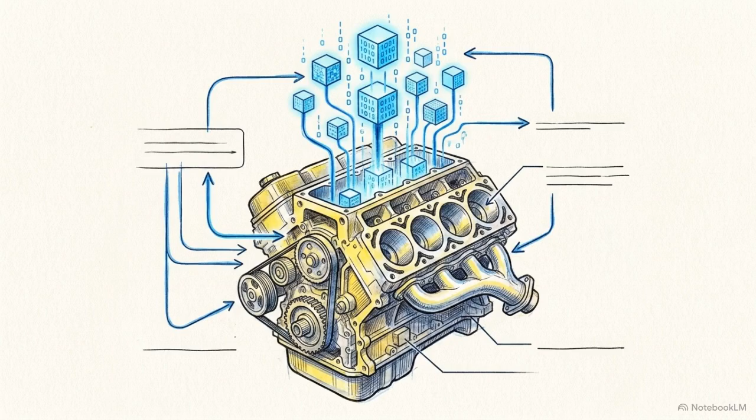The automotive industry is abandoning traditional hardware-centric vehicle design in favor of the software-defined vehicle, or SDV. In this architecture, software code entirely governs the vehicle's performance and functionality.

To support this processing load, manufacturers are replacing dozens of isolated, single-function electronic control units with a streamlined network of high-performance computers organized into zonal and domain-centralized architectures. This structural shift requires high-speed gigabit Ethernet and vast external connectivity.

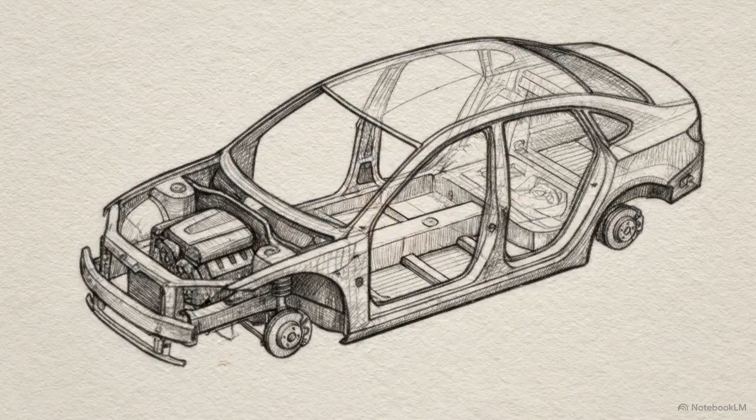As we see in this wireframe chassis, the immediate consequence of connecting internal steering controls to external cloud networks is an attack surface that multiplies rapidly across the entire vehicle topology.

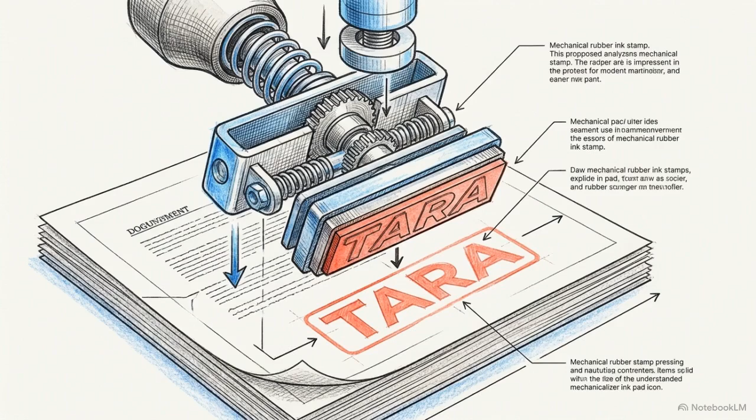Recognizing the physical danger of compromised vehicle networks, international regulators implemented strict standards. The UNECE WP.29 R155 mandate and the ISO 21434 standard now require manufacturers to perform systematic threat analysis and risk assessments, or TARA, across the entire vehicle lifecycle.

Securing a certification under these mandates is a structural engineering requirement. If a manufacturer cannot mathematically prove their architecture mitigates identified threats, the vehicle cannot legally enter production.

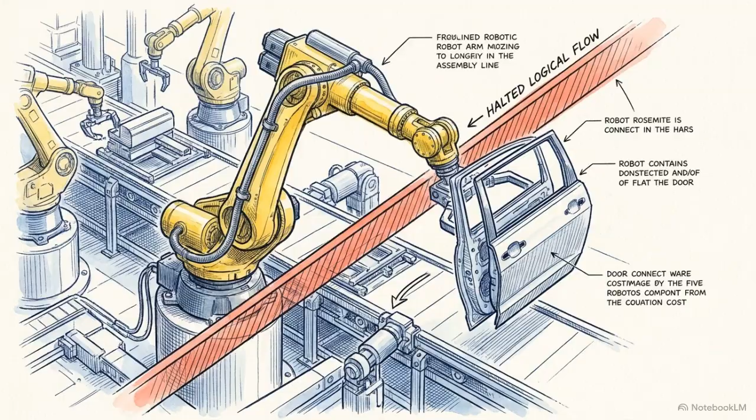Traditionally, engineers managed these security requirements through document-based systems engineering, tracking constraints using static text in spreadsheets, disconnected architecture diagrams, and SysML version 1 profiles.

The critical flaw in this approach is the isolation of data. A security requirement typed into a spreadsheet cannot interact with the engineering layout, meaning it cannot mathematically prevent an architect from connecting an unencrypted port to a critical safety system.

The language achieves this precision by strictly separating elements. Engineers build reusable blueprints called definitions, like a standard firewall, and deploy them in specific contexts as usages across the vehicle model. Because of its underlying metamodel, SysML v2 provides a standardized textual syntax.

This means system architecture is now written, managed, and version controlled exactly like programming code. By converting static diagrams into compiled code, a multi-layered defense-in-depth strategy transitions from a passive drawing into an executable, verifiable program that actively governs vehicle development.

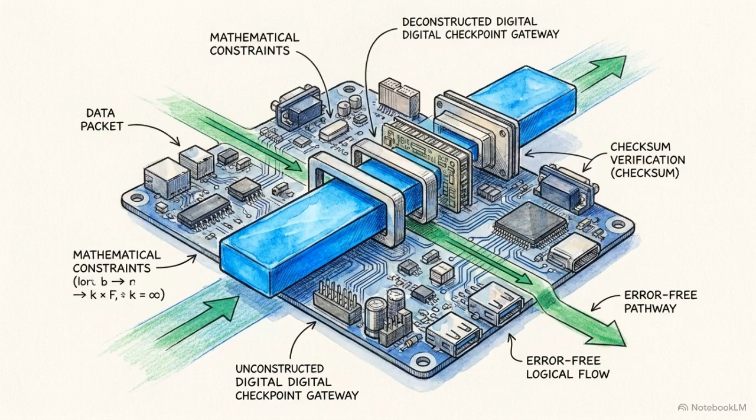Embedding these constraints directly into the connection logic mathematically removes human error. If the encryption parameters between the cloud and the gateway do not match precisely, the model will fail to compile.

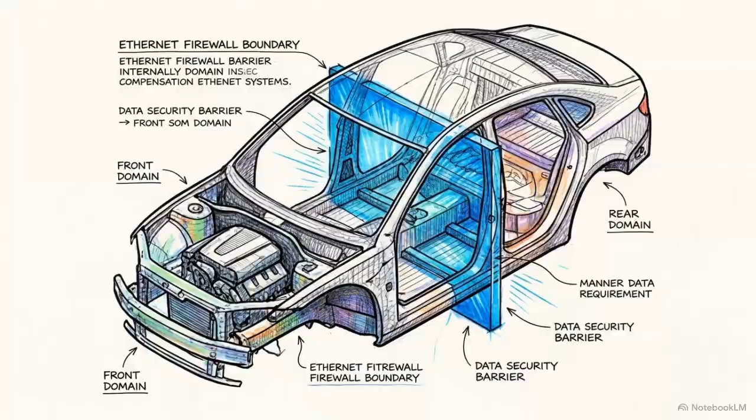Past the external boundary, the central gateway acts as an internal Ethernet firewall, physically separating untrusted external traffic from critical internal domains like steering and propulsion.

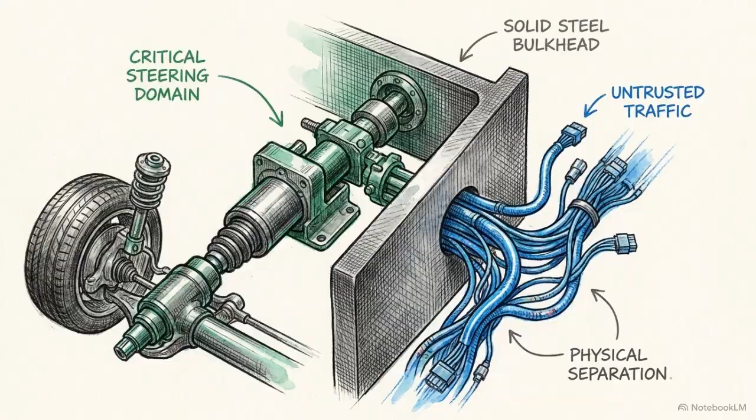This diagram illustrates how we move beyond static physical routing. By applying the action def and perform keywords, we program the firewall to execute a dynamic packet filtering logic based on predefined IP whitelists. The gateway evaluates every incoming data packet against these constraints.

Packets matching the whitelist are forwarded to the internal switch, while unauthorized traffic is systematically dropped.

However, static firewall rules cannot defend against dynamic behavioral attacks, such as an infected module attempting to flood the internal network with rapid-fire messages. This requires an active intrusion detection system, or IDS.

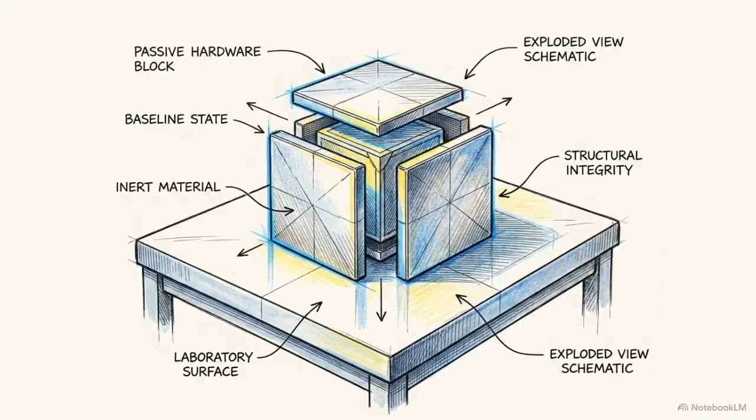Looking at this state machine logic, we use the state-def keyword to model the IDS behavior. Under normal conditions, the system remains anchored in an active monitoring state. When the IDS detects a frequency anomaly, like an unauthorized diagnostic session or a packet flood, it triggers an immediate transition, shifting the gateway from monitoring to a restricted fail-safe or blocking state, quarantining the compromised zone. By integrating state and action commands, SysML v2 elevates the gateway from a passive hardware block into a self-contained behavioral software model.

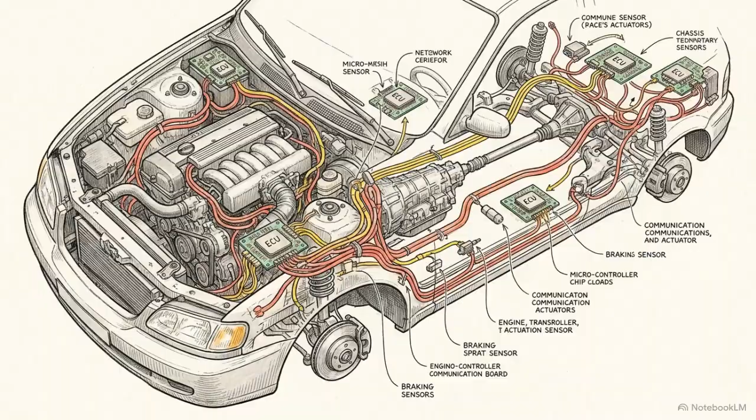The final layer of defense secures the internal communications between electronic control units. If a hacker breaches the gateway, they must be prevented from injecting forged command messages into the braking or chassis networks. The AutoSAR standard addresses this using the Secure Onboard Communication Protocol, or SecOC. It requires every critical control message to carry a cryptographic message authentication code and a freshness value to prevent replay attacks.

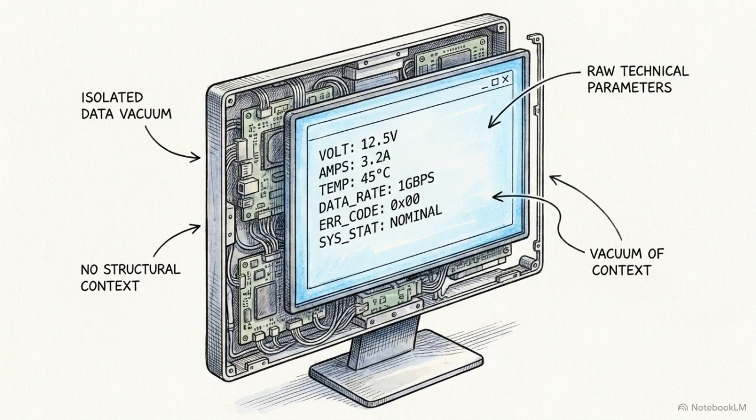These deep technical parameters cannot exist in a vacuum. They must trace directly back to the original threat analysis and risk assessment generated during the vehicle's initial concept phase. Utilizing the RAAML extension profile, architects tag specific hardware components with an @item metadata annotation. They then use satisfied dependencies to directly link the cryptographic constraint to the specific threat scenario it mitigates.

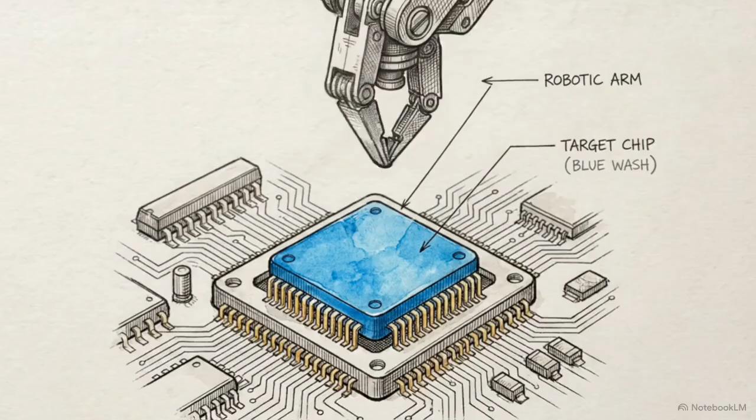This creates an unbroken chain of traceability. If an engineer later attempts to swap the ECU for a cheaper component that lacks encryption support, the system instantly traces that hardware change up the chain, highlighting the exact security goals that are now failing.

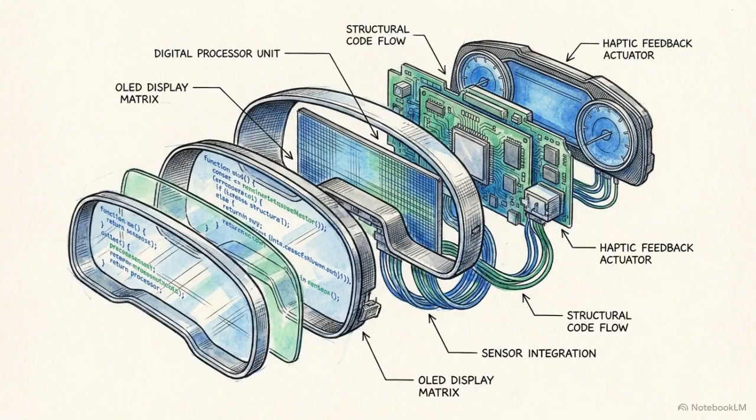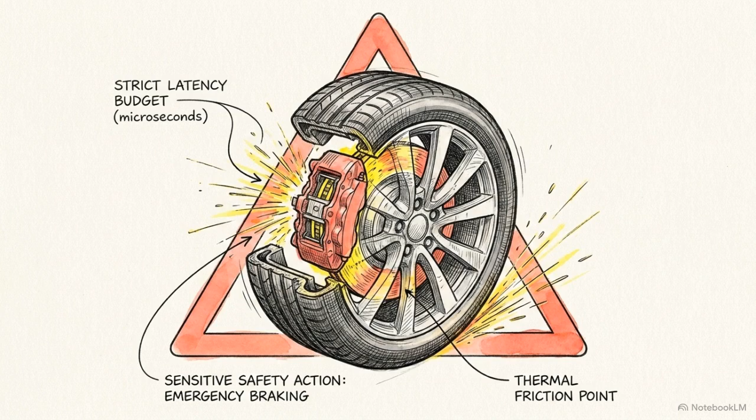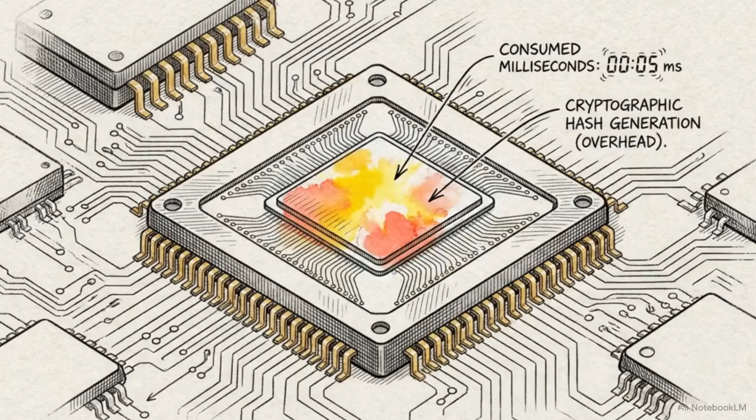Implementing these security layers reveals a critical engineering paradox, resolving the conflict between the real-time demands of functional safety and the heavy processing burdens of cybersecurity. Under the ISO 26262 functional safety standard, highly sensitive actions like an emergency braking command have strict latency budgets, often requiring execution in under 5 milliseconds. However, generating SecOC cryptographic hashes adds severe processing overhead. The microcontroller must compute complex algorithms before the message enters the network, consuming precious milliseconds.

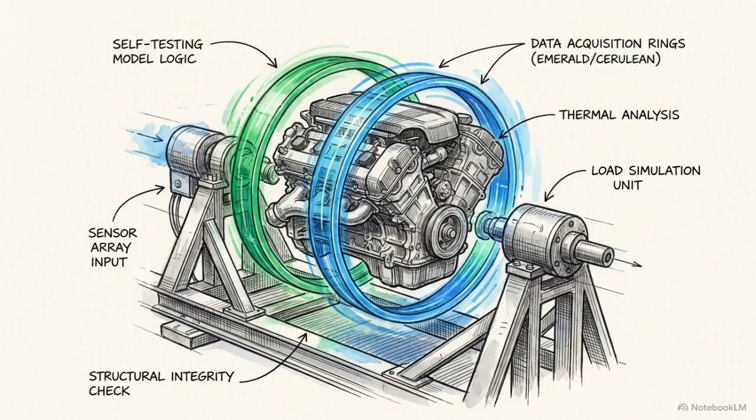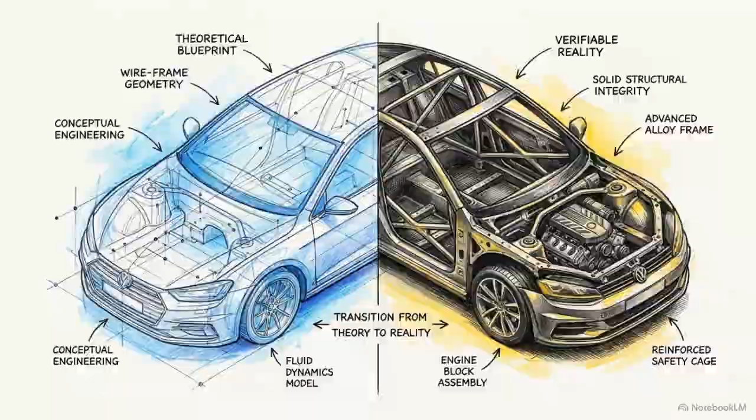To prevent this conflict from making it to production, we apply SysML v2's verification case. This syntax allows the model to actively test itself. We embed a parametric solver equation into the verification case, defining total latency as the sum of transmission, encryption, and decryption delays. The built-in solver actively pulls processor speeds defined earlier in the ECU's part def and executes the math automatically. This transforms design from a theoretical assumption into a verifiable proof. The architecture actively computes its own physical limitations.

Consider a scenario where an engineer specifies a mid-range microcontroller for the braking domain. The automated solver runs the latency equation and calculates an execution time of 7 milliseconds, exceeding the functional safety limit. The system reacts instantly. Because the calculated value violates the constraint, the compiler throws a semantic error, and the satisfied dependency link connecting the ECU to the braking requirement shatters. The model refuses to compile.

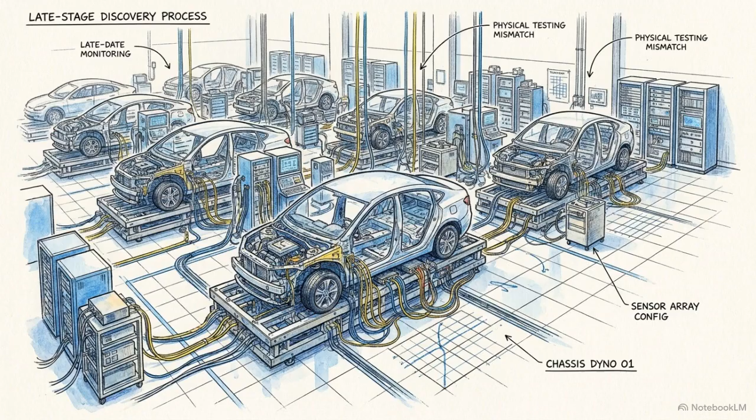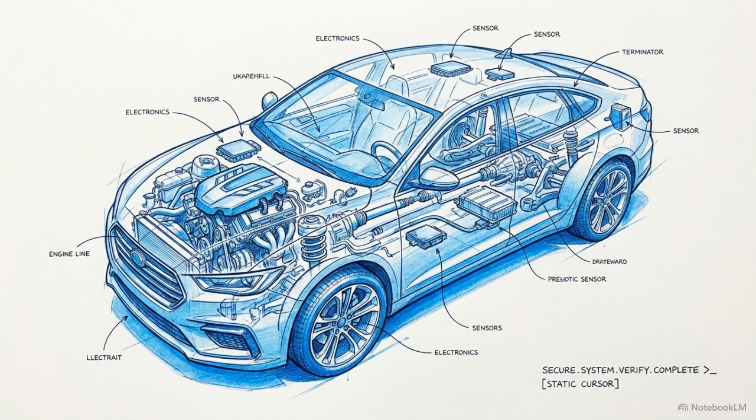This absolute refusal of flawed logic is the realization of shift-left engineering. In a traditional workflow, a latency mismatch between safety and security might only be discovered months later on a physical test bench, resulting in severe delays and millions of dollars in scrapped hardware. SysML v2 embeds security policies directly into the mathematical laws of the architecture. This structure neutralizes human error and architectural conflicts at the design phase, ensuring the system is secure before the first line of production code is even written.